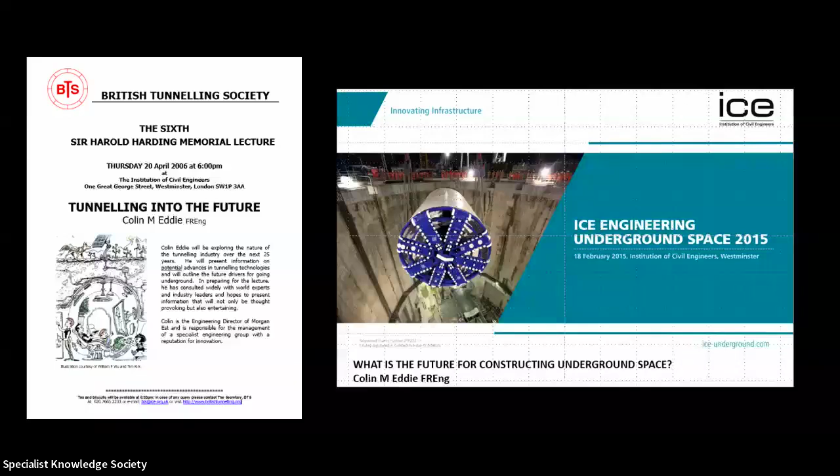John mentioned the Harding Lecture, and as a number of you know, I've been banging on about extruded linings for a long time. The difference tonight is that when I spoke at the Harding Lecture, I just thought it was a good idea and that we should do some further work. When I spoke again in 2015, I didn't have a solution, I was just suggesting this is a really good idea and we should do some work. We formed a number of consortia and applied for government funding to do exactly that, and unfortunately we failed each time. So I got to a point of thinking, if this is ever going to happen, I'm just going to have to fund it myself. As a company we're not big, but we've spent 20% of our annual turnover, about 40% of our profits, on this research. So we've invested in it, and we believe in it.

If we look at the historical context, you're probably thinking, I've heard all this before - haven't they? Extruded linings have been around a long time and they've never worked. I think that was Colonel Beaumont's Channel Tunnel, around 1880. It wasn't an extruded lining, but it's a nice picture.

Arguably the start of this discussion is with Marc Brunel, who spoke about the process of tunnelling around the shipworm and how that shipworm would gnaw at the timbers and extrude a lining behind it. That's the sort of inspiration he took for his patent, which actually looks nothing like the tunnel shield he used on Rotherhithe, but nevertheless was the inspiration.

Some of you may be surprised to know that extruded linings go back a long way. The research we've been able to do over the last 6 years shows the Russians in the 1960s were first. We want to be very respectful of what's gone on in the past - we're standing on the shoulders of other engineers. One issue in the 1960s is that they only had normal concrete, they didn't have any of the wonderful admixtures that master builders can provide nowadays. So this process was a jump shutter - basically erecting a shutter and placing concrete behind it - with no benefit to the industry compared with a segmental lining.

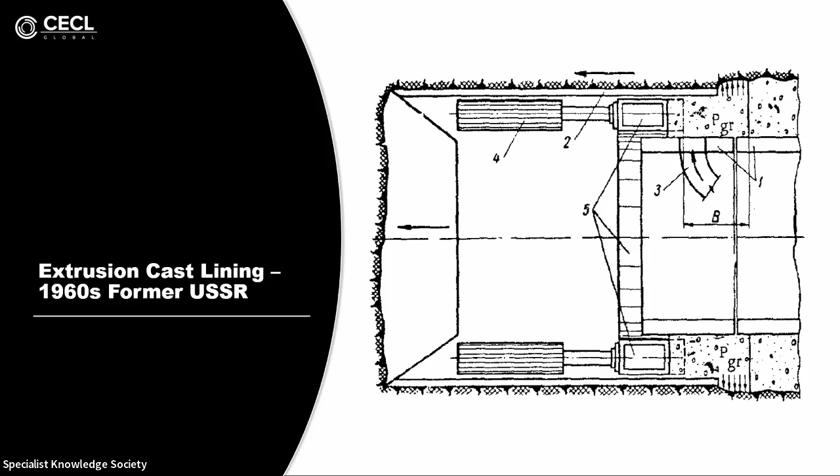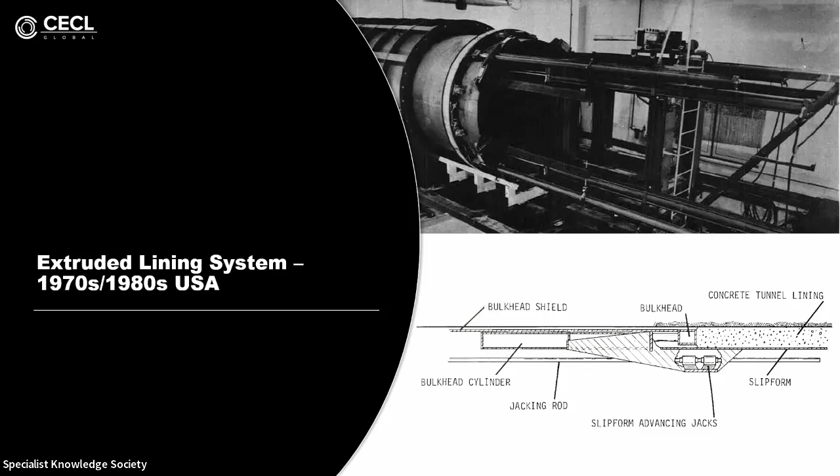So there were many good things that came out of this, but at the end of the day, they threw the towel in. It didn't work, and it was no benefit to the industry.

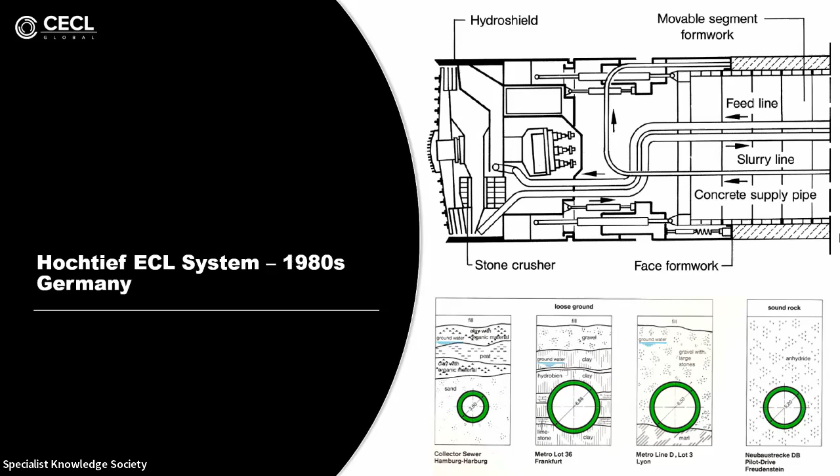We then move on to the 80s, and Hochtief, as a number of you will be aware, spent considerable time and effort looking at extruded linings, and they built a number of projects. But they weren't the most efficient. They certainly didn't break any speed records, and the quality of construction was not acceptable.

And I think this is a really key issue that over my career, as John has mentioned, I've been fortunate to be involved with people that have, and we've been able to do new things, but it's got to be a benefit. It's got to be more cost effective. It's got to reduce the carbon. It's got to be safer. There's got to be a benefit.

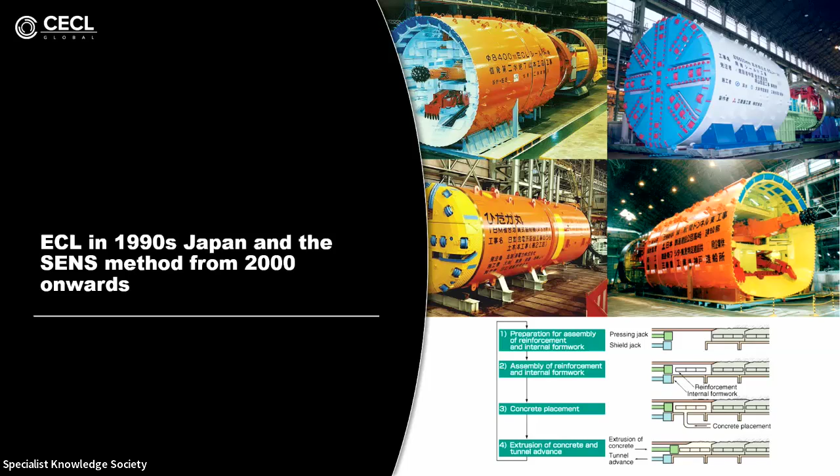And unfortunately, the experience of extruded linings up to this point was perhaps building us to the point we now are. We've got new materials, we've got new ways of doing things, and so perhaps the time has come. I don't think this one got off the drawing board. Again, accelerated concrete, and probably the most recent relining system is using effectively an accelerated sprayed concrete and a form.

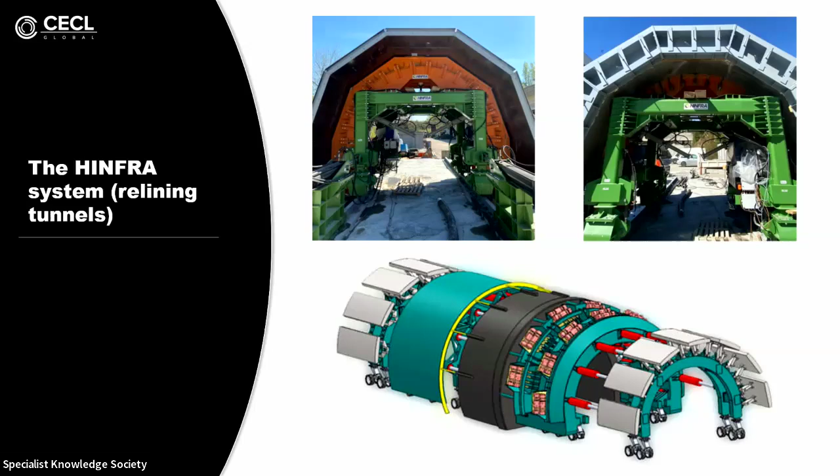So what we're going to talk about this evening is completely different. And I should say right from the start, we're not flying any kites here. We absolutely believe in what we're presenting today, and we genuinely believe that this is a viable method for the future.

We know existing technologies. I quite often followed a vehicle up, I think, the M5. I'm not entirely sure where the segment was cast, but an artic truck carrying one large precast segment, and you're thinking, how inefficient is that?

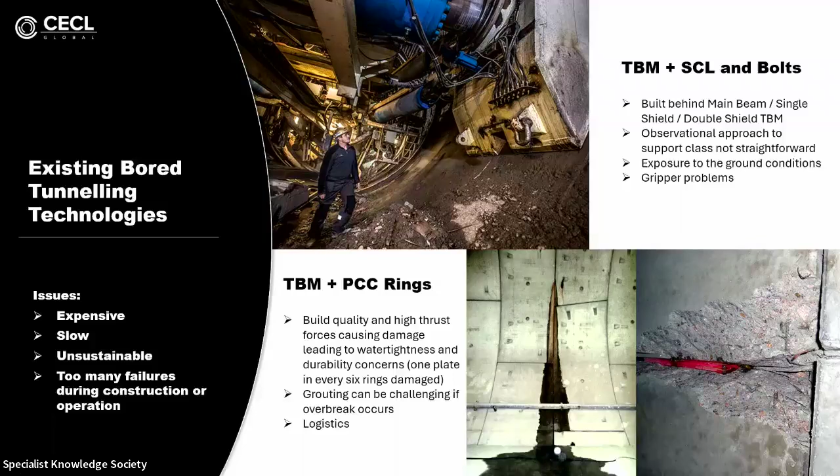And we all know in rock tunnels, we have the issues of using sprayed concrete and bolts and the waste factors and all sorts of issues. With precast concrete rings, which of course, we've deliberately picked a very bad example of some damaged rings, but we all know that it's possible to damage the rings. And what we're trying to do is simplify the process, reduce the waste, and reduce the damage.

But there's three challenges that we have to face. First, the formwork. So the formwork traditionally for extruded linings was not a slipform lining. It was disassembled and reassembled, so labor intensive and of little value compared with conventional technology.

The materials - a lot of the work that's been done on extruded linings was done before the advent of high quality fiber reinforcement and the concrete admixtures that we use today. And the quality - we've not been able to find any examples of defect-free extruded linings.

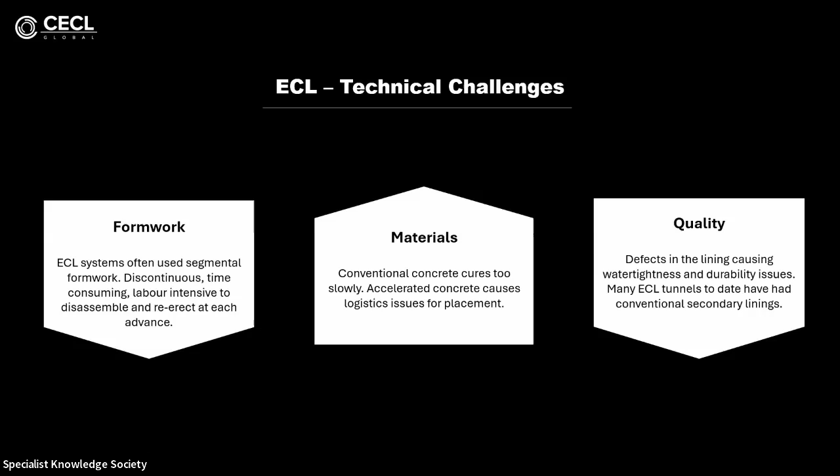So, you know, that's where we're at. So we took a fundamental rethink about how we're going to look at this. And without wishing to steal Henry's thunder, what we're doing is producing an instant structural lining. So it doesn't rely on any chemical process or hydration of cement. And what we've done is look at two different systems.

So the synchronous, which means it lines the tunnel as you're excavating it, and the excavation process could be with a backhoe, it could be with a road header, it could be a full face TBM, it could be a slurry shield, an EPB shield, a variable density shield. The front end, the digging bit, is existing technology. What we're replacing is the lining - we're getting rid of the precast concrete lining and the grouting.

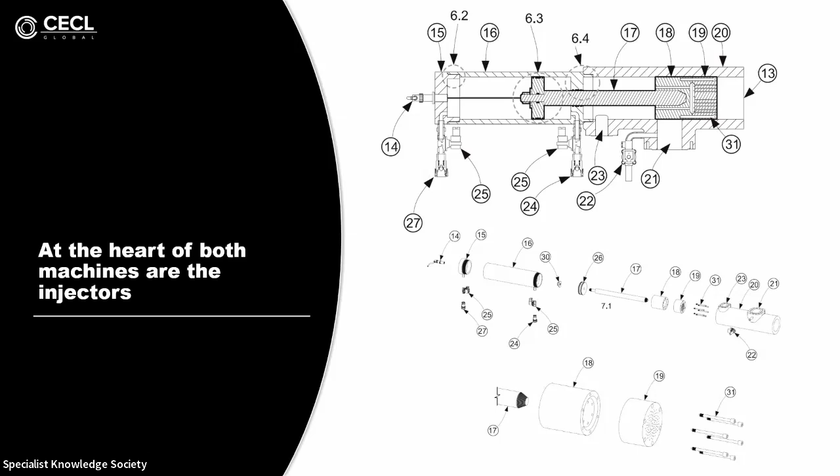But there's also a non-synchronous system, which is meant for relining existing tunnels. And at the heart of this is something we call the injector. So it looks a bit like a concrete pump, but it's not. It hasn't got an interference fit. It's designed actually to squeeze water, a small amount of water, and - Henry will go into more detail - to compress the material to form the structural material.

It can be used for any profile. So one of our partners has got a long history of building TBMs which are non-circular, so triple-headed or double-headed TBMs. So pretty much any of those profiles could be used.

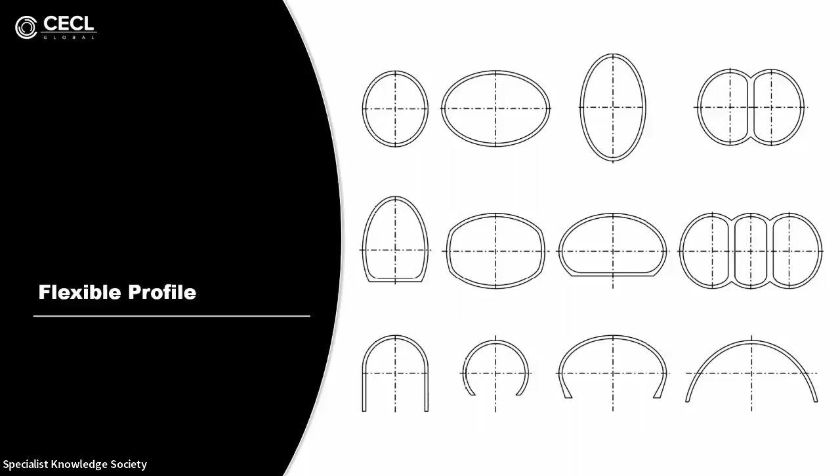If we just look at the basic pillars, there's two parts to the process. My focus has primarily been on the equipment, and Henry, for the last 6 years, has been making lots of mud pies at the University of Warwick and torturing lots of samples, and he'll talk about that in more detail.

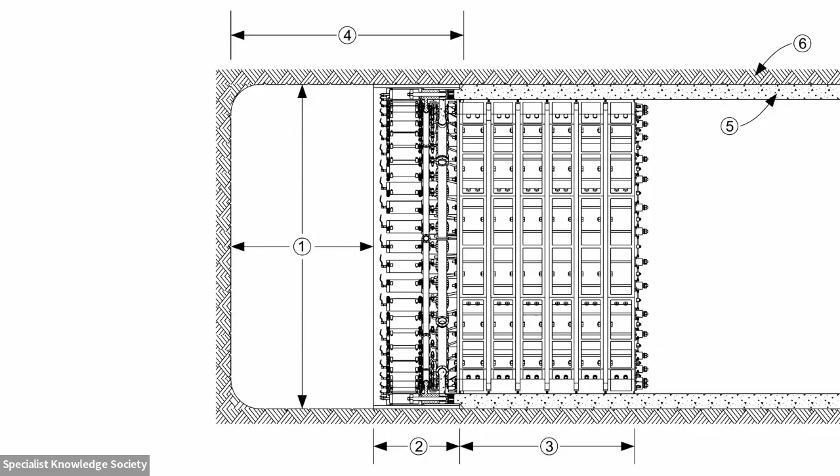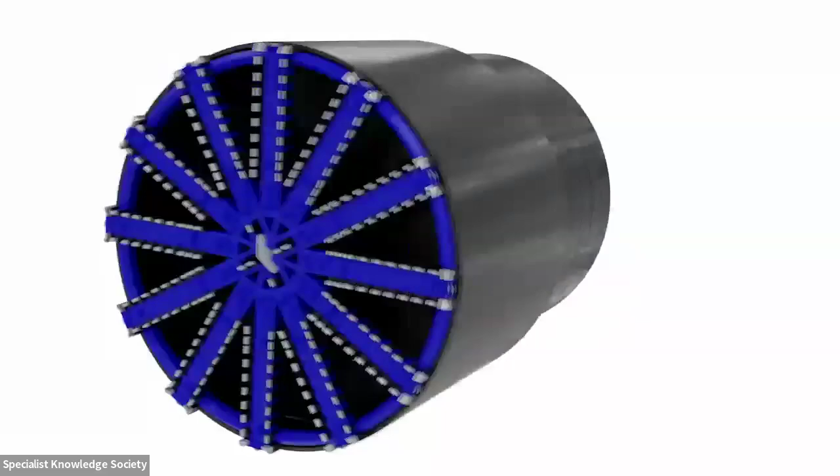So if we just show a visualization, the front part of this machine can use any conventional excavation process. The red pipe is the concrete supply pipe, and the blue pipe is a continuous flushing and cleaning system.

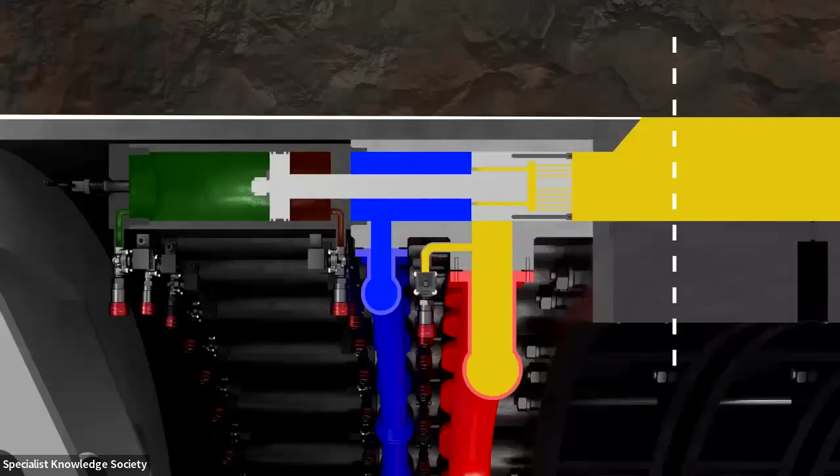One of the challenges, and I expect to get lots of challenges today, is that we all know tailskin grouting systems are the bane of tunneling contractors' lives. They keep blocking, they cause lots of delay. In fact, one very reputable TBM manufacturer told us informally that concrete and TBMs don't go together. We absolutely agree with that.

That's why having an integral cleaning system, which is actually part of the system and systematically done, we think is really important. So what you saw there was the synchronous machine.

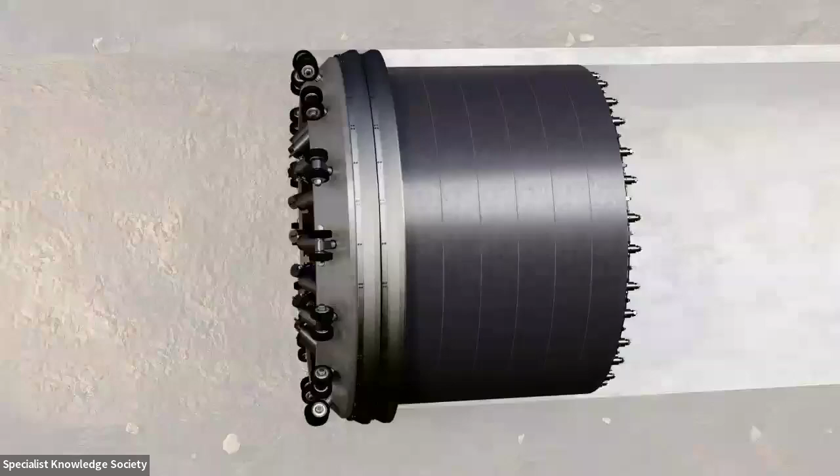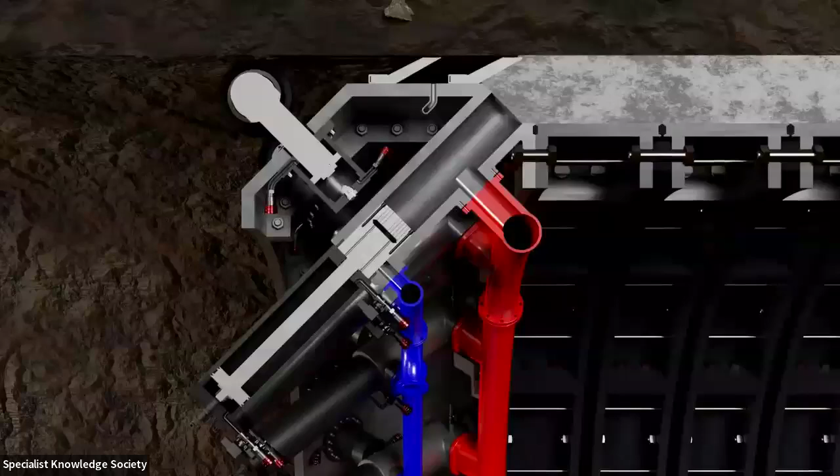This machine, to enable the process to get sufficient pressure to place and crush the material in place, there has to be a resistance. So those wheels, or they can also be skids depending on the nature of the substrate, are controlled by fuzzy logic. We've ruthlessly abused the master's program at Warwick University to look at all of these things, using fuzzy logic to control the load in those wheels, because what we're trying to do is have a self-centering system that'll follow a theoretical set of coordinates, irrespective of where the substrate is.

Within reason, you can see here that the reason the injectors are vectored is that we don't want to generate too much forward propulsion going to the left-hand side of the image. So for the non-synchronous system, that's why we've got the incline injectors.

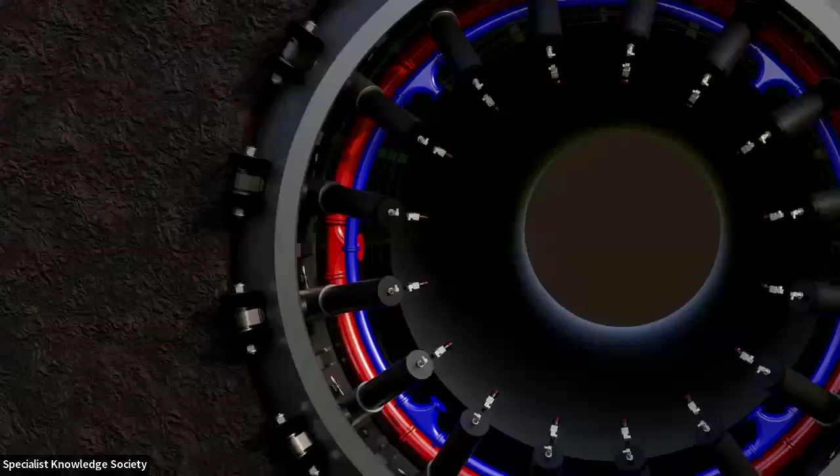One of my team spent quite a lot of time doing these visualizations. The purpose is rather subtle, but you can see that the wheel is sort of going in and out, and they're hydraulic actuators designed to self-center the system, but also to apply the braking.

So yes, there will be drag on the shutter, but actually it's not going to be that huge. So we need to provide another restraint force, and that's where those wheels or skids will come in.

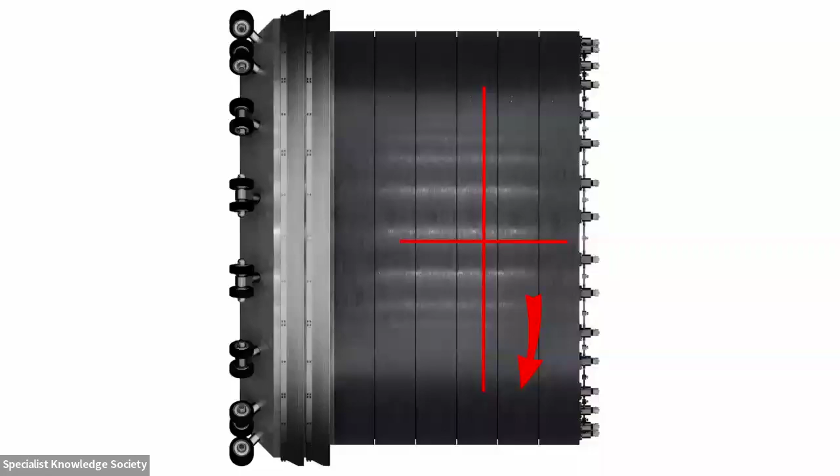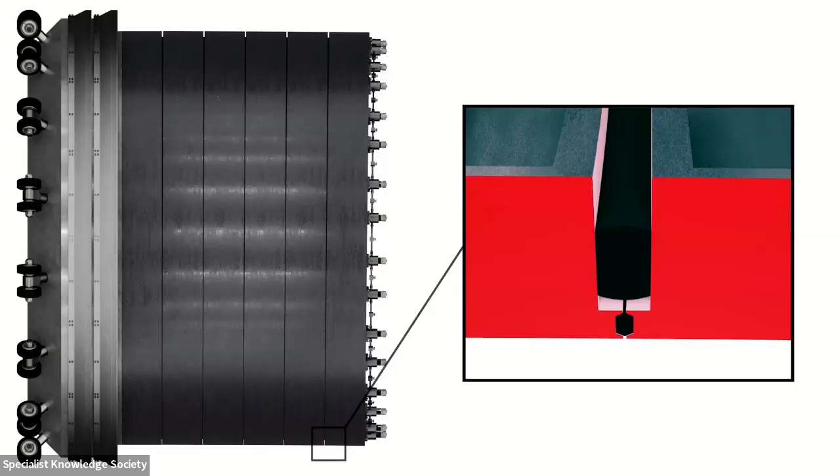The shutter—there's a little printed model that we've got here. This pretty much for any size of tunnel, we're expecting the shutter would be 3 meters long, whether it's 16.5 meter diameter or 3 meters in diameter. The shutter's articulated, obviously, because it needs to go around corners, but it's passive articulation.

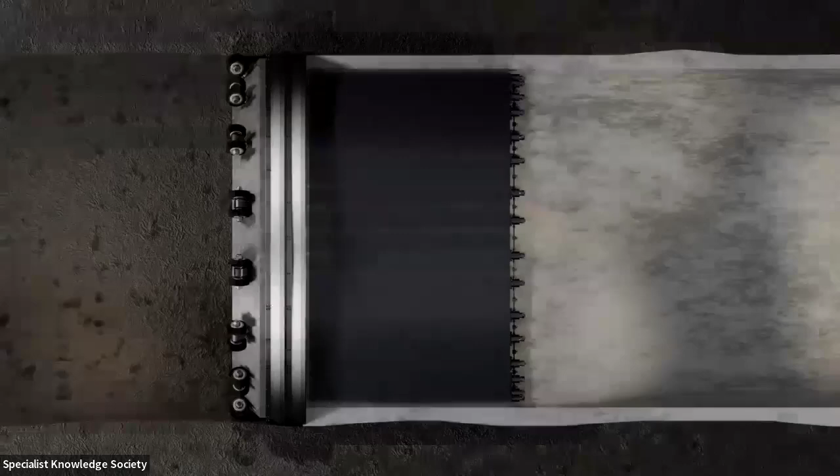At the end you'll see there's some hydraulic rams. The high tensile Macalloy bars, or Dywidag bars, run through the length of the shutter. Those actuators are coupled in series, so all of the load in each of the bars remains exactly the same, irrespective of how long the bar is. We think that's really important because we've got to go around curves, and we need a passive, dumb system.

So at the heart of this machine is its simplicity. It's absolutely simple, and it's been built such that every component could be replaced underground if necessary.

If we just look at the balance of forces, the only thing that's moving this machine forward is the injectors, and there are quite a lot of them. For a typical shield, we kind of default to 49 actuators. There are a lot around the perimeter because we don't want them too far apart.

Those injectors have got to provide enough forward propulsion to overcome the thrust on the cutter head, the drag on the shield, the drag on the shutter, and the fairly nominal loads that would come from any trailing gear.

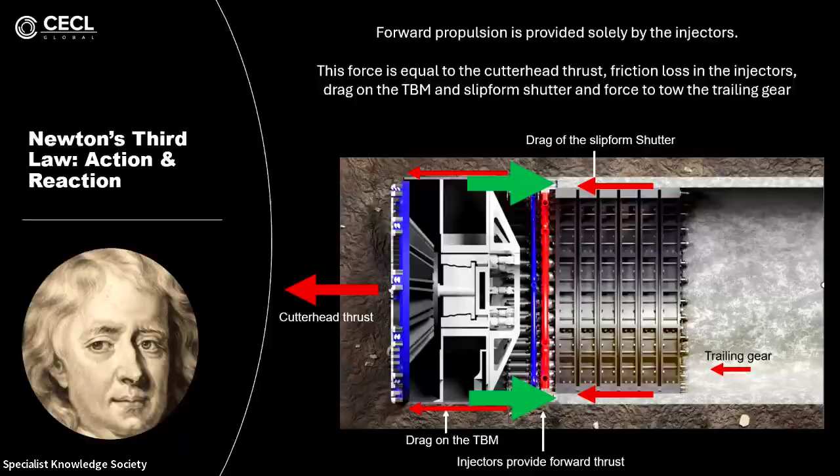If we just look in real time, the typical stroke for the injector would be about 300 millimeters. So it's actually very little concrete, very little and often. The speed you're seeing in this animation is probably the sort of speed if we were advancing a TBM at, say, 50 millimeters a minute. Most of us would be pretty happy at 50 millimeters a minute.

The whole system, however, has been designed for significantly higher advance rates. But of course, for the synchronous system, that depends on how quick we can excavate the tunnel.

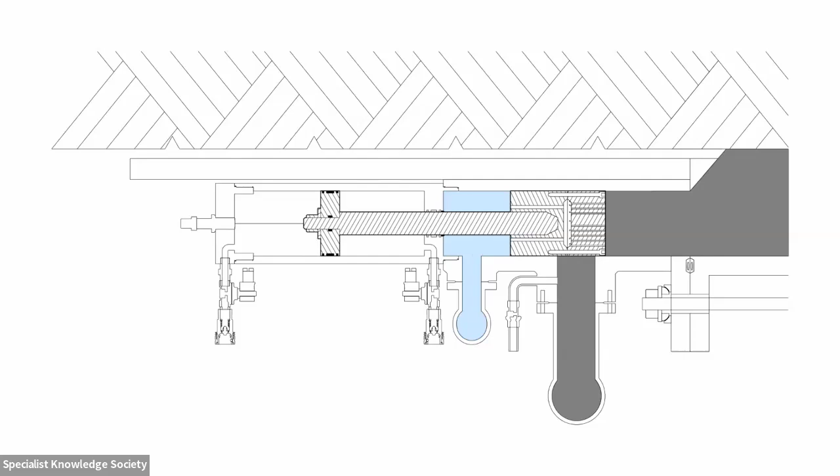A really important part here of the design is the length of the injector head. That bit of metal at the front covers the supply pipe because obviously we don't want to just press the concrete back down from the position that it came from.

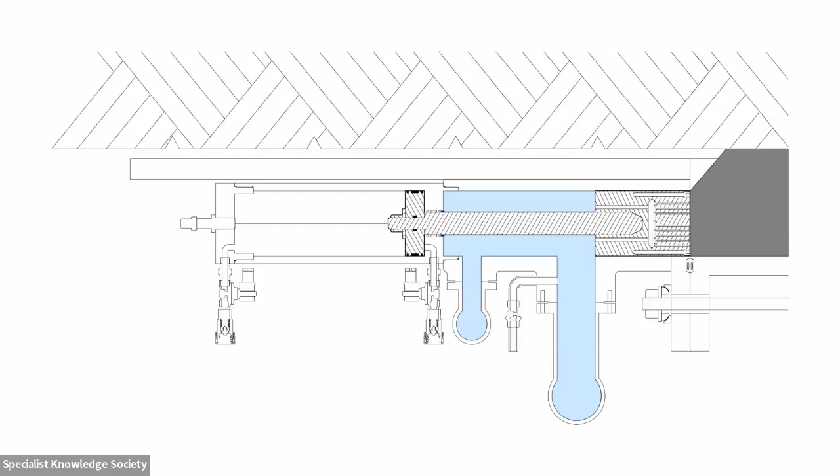And then at the end of the cycle, being overdriven such that the whole system will go into flushing mode for cleaning purposes. If we cannot clean this system, it will be hopeless. It will never work. We're not using concrete, but it's quite similar, and it does have some Portland cement in it. So we've got to keep the system clean.

And if we unwrap the system, this animation is a little bit crude in that it kind of shows all of the actuators moving in and out at the same time. This is not correct, actually.

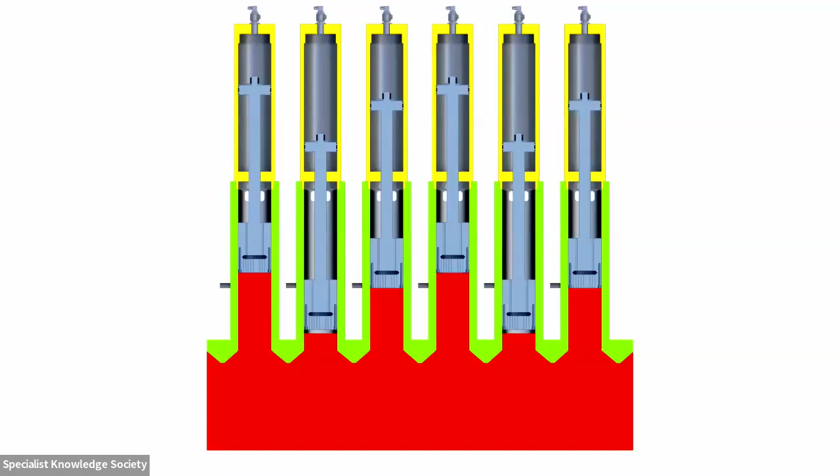In reality, each injector has simple laws that it's given. The simple law is it continues to push until it gets to a maximum pressure, and then it stops. Its next law is if it gets to its full extension, it returns. And its final law is if it's been told it's going into cleaning mode, it pushes an extra 100 millimeters further. And so the rate of advance of the machine is governed just by one parameter, and that's the speed of the forward stroke of these injectors.

And so with that, I'll hand over to Henry.

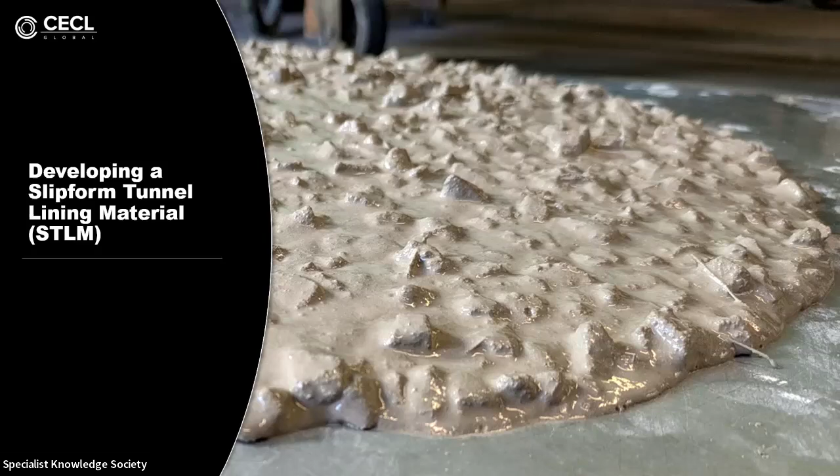Thank you, Colin. So the starting point for our research and development into a slipform tunnel lining material, STLM - that's the acronym I'll probably keep referring to - is the requirement. So what does this material fundamentally need to be able to do at each stage in the process?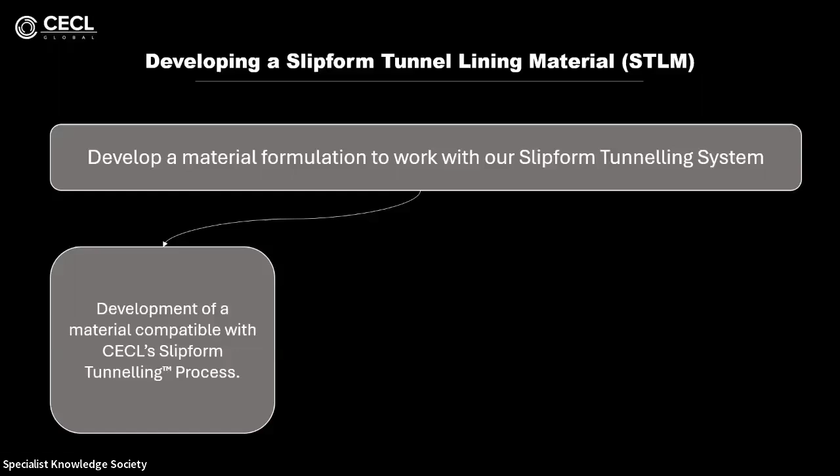Firstly, it needs to be compatible with the slipform tunneling process, and this has involved some iteration with the equipment design and development, as well as the material research and development work. And the material also needs to be commercially viable, meaning consideration of component costs, embodied carbon, and material availability have been very important to the development.

We know from the outset of this process that it'd be unsustainable for the process to rely on expensive or exotic components which have, say, poor global availability. A key part of the development has been consideration of the mechanical properties. But we've also been mindful and done a holistic systems engineering approach to this development, to ensure that the material satisfies requirements on things like fresh properties and long-term durability, as well as the logistics implications of actually constructing this underground. So it's been a 5-year research program to develop the STLM to where we have it today.

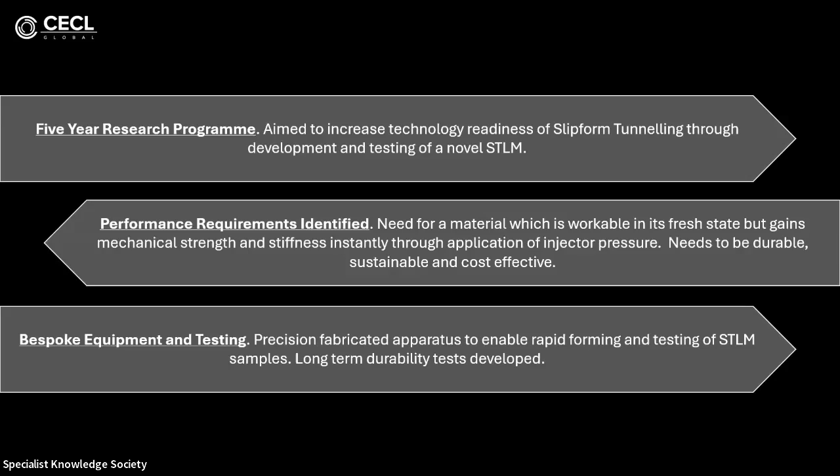And in order to effectively test the material, we've developed bespoke equipment to simulate the injection process and understand the properties of the material post-injection, with physical research carried out at the University of Warwick.

So we developed a bespoke arrangement to simulate the conditions of injection at full scale in the laboratory. Using a 100-ton servo-hydraulic actuator on a modular reaction frame, we're able to form large samples - 150 millimeter diameter, 300 millimeter high samples - under pressure as part of our development and testing work.

So we've designed our forming equipment, this sort of simulated injector, as a split cylinder. This split cylinder is heavily reinforced to keep its stiffness, with bolted sections together, which can be rapidly demolded following forming. It has a common base plate to this system, and then we can test it quite quickly after forming in either an unconfined or a confined triaxial testing arrangement.

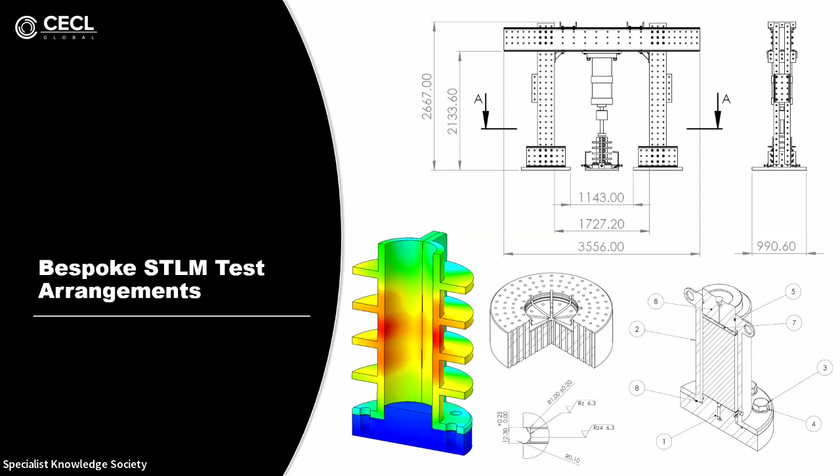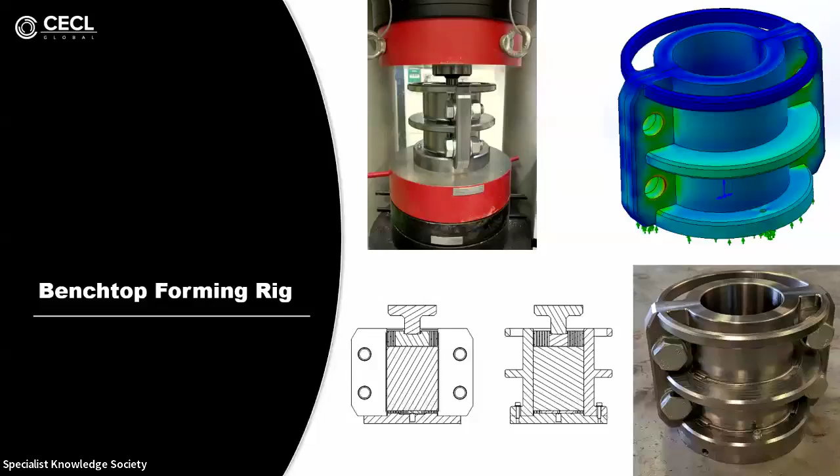So more recently, we've developed a smaller, slimmed down version of this rig, which allows forming of smaller samples for material characterization - a benchtop forming rig. It's a rig that can fit in a standard compression test machine for concrete and can be handled by a single person. So it allows more samples to be made in one working day, and has been very useful for some of the more recent mix optimization trials we've done. And looking forward, it could be used as a production quality assurance tool as well.

So onto the STLM mix itself. What we've developed is something that is flowable in its fresh state, but upon application of this injection pressure, it immediately gains strength and stiffness through mechanical processes rather than a chemical hardening process, densifying the material in situ through that high injection pressure.

The mix itself has many of the components you'd see in a conventional concrete, so aggregates, cementitious binder, water, steel fibers, polypropylene microfibers, but it's formulated in such a way that it's enhanced by this mechanical process to give us this very early age strength and stiffness.

So the binder component of it uses Portland cement, which is replaced with partial replacement with limestone and calcined clay, supplementary cementitious materials, and overall has quite a low Portland cement content.

We've deliberately moved away from using GGBS and fly ash as SCMs for availability, cost, and sustainability reasons, and preferring the LC3 type binder that we've been using.

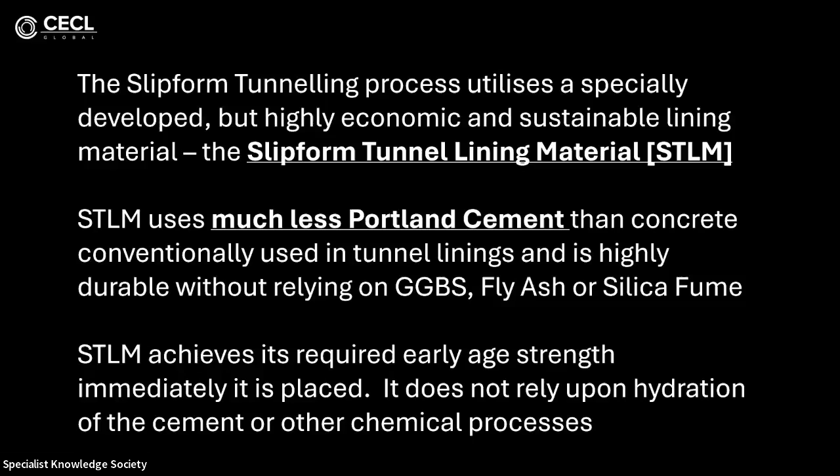So when I talk about very early age strength and stiffness and mechanically derived strength and stiffness, what do I mean by that? We've done some isothermal calorimetry studies on the binder part of this mix, and what that shows is circa 10 hours, we start to get the main hydration reaction happening in the initial setting of this material.

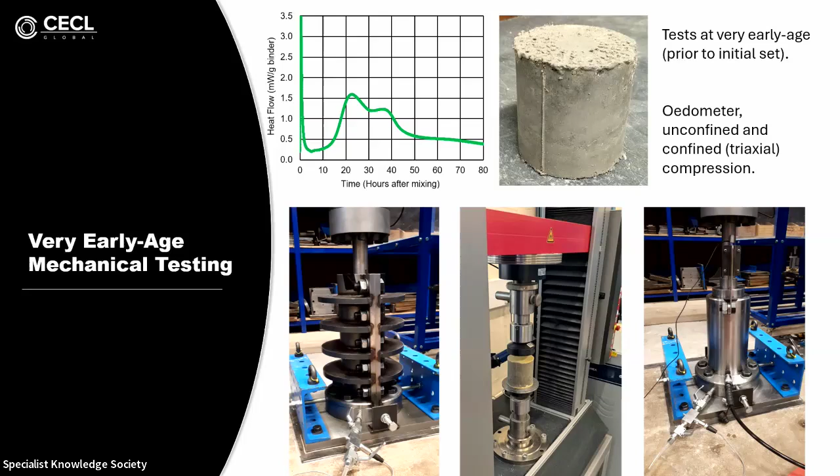So we've been doing our very early age tests at less than 2 hours typically from mixing. This is well before the initial set and the main chemical process kicks in. That 2 hours is basically as fast as we can strip and demold the sample from the equipment and set up the strength test. So the results at this very early age are really mechanically derived strength and stiffness, purely from that compactive effort.

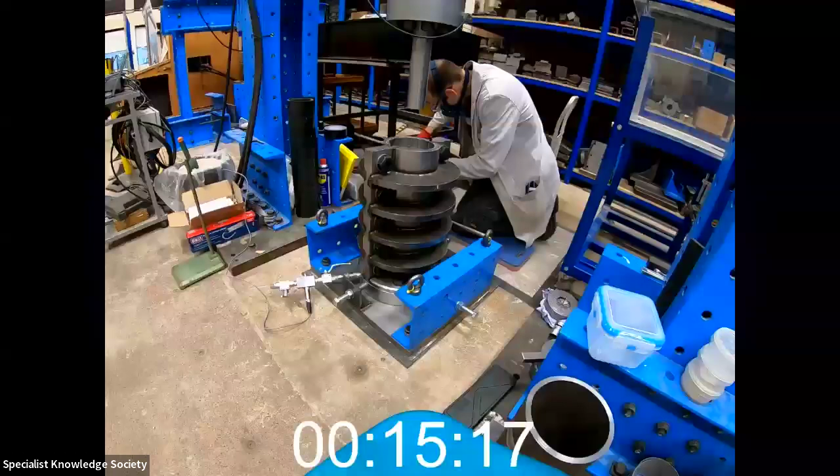So this isn't me just having had too many cups of coffee - this is a sped up video of the whole test process, from mixing the materials right through to forming the sample.

So we've put a lot of instrumentation on this rig, controlling the deflection rate to simulate the injection process with the servohydraulic actuator, measuring the stresses in the sample, recording these with the data logging system, and looking at things like pore pressure within the sample.

This is essentially almost like an oedometer test. What we're doing during the forming process - and I've definitely got a stronger right arm from doing all these bolts up hundreds of times in the lab now.

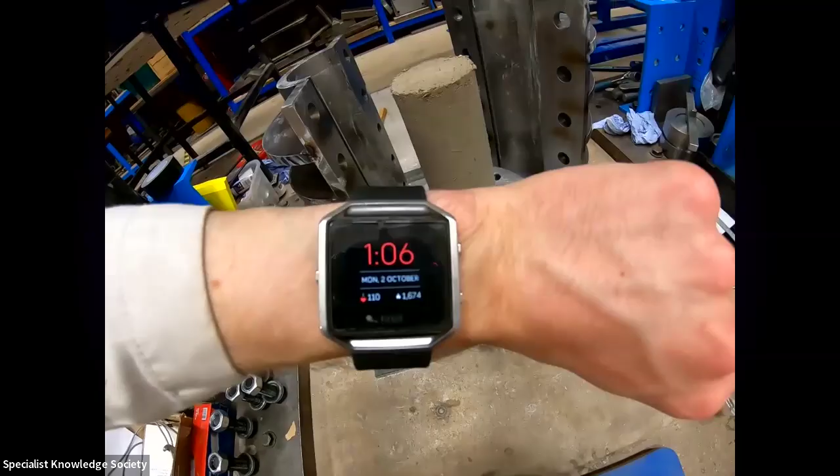But you'll see when I strip the sample, this is what we're forming very rapidly. So it goes from a flowable concrete through to something with appreciable strength and stiffness instantly because of that high compactive force from the injection pressure.

So on to looking at the mechanical performance that we've observed in the testing. The material exhibits a stress-dependent shear strength behavior from the triaxial testing that we've done in the very early age - this is also sub 2 hours after water hits the cement - as well as stress-dependent stiffness and ductile behavior in this material.

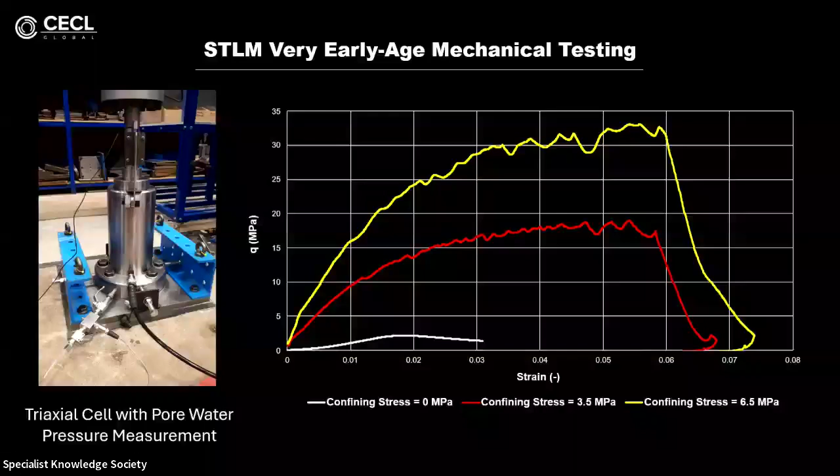So this can be fitted to the well-known Mohr-Coulomb relationship and strength envelope, where we've been able to demonstrate a significant cohesion to this material, as well as a high internal angle of friction for the material at very early age.

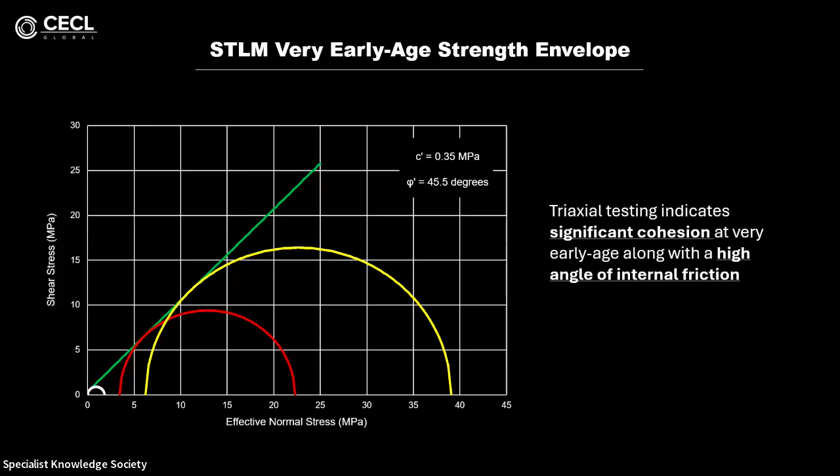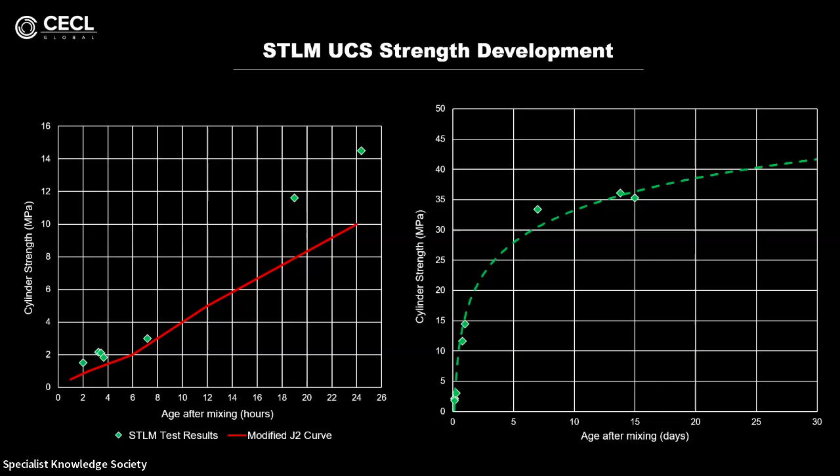If we look to longer term, so when we're expecting some hydration from the binder components, we achieve a good strength gain in the first 24 hours, exceeding that required by the modified J2 strength curve, and structural concrete behavior in the longer term, where the chemical hardening of this ternary LC3 binder system has been working very well, even at high replacement levels.

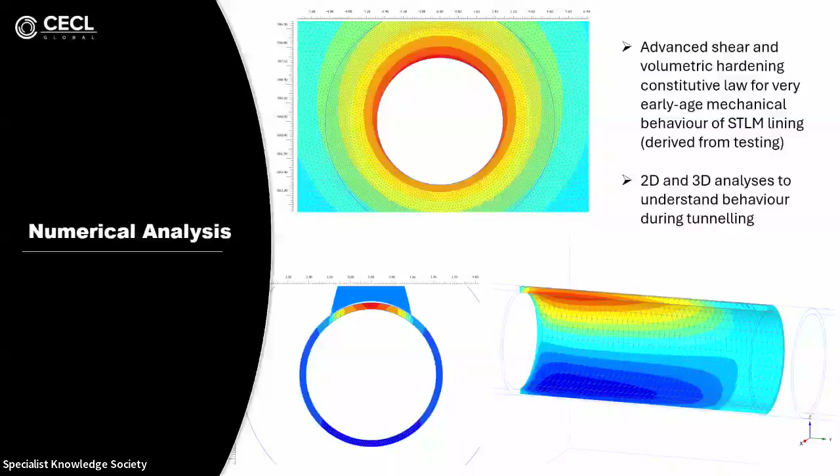We've also done validation in numerical studies and finite element studies, 2D and 3D, using the results of the physical testing in forming an advanced constitutive model for the STLM, running simulations at tunnel scale, and looking at strain-based considerations to understand its performance in the real world.

Onto the robustness and durability aspects and the testing and analysis we've done here.

Firstly, a qualitative look at the STLM structure from peering inside these samples using X-ray CT scanners, with some assistance from the National X-ray CT Centre, which has a base at the University of Warwick.

It's apparent that the STLM samples are tightly packed, with a high aggregate ratio in their compressed form and low porosity, and a high density of 2,500 kilograms per meter cubed or higher. This qualitatively suggests that the lining would be very durable in the long term.

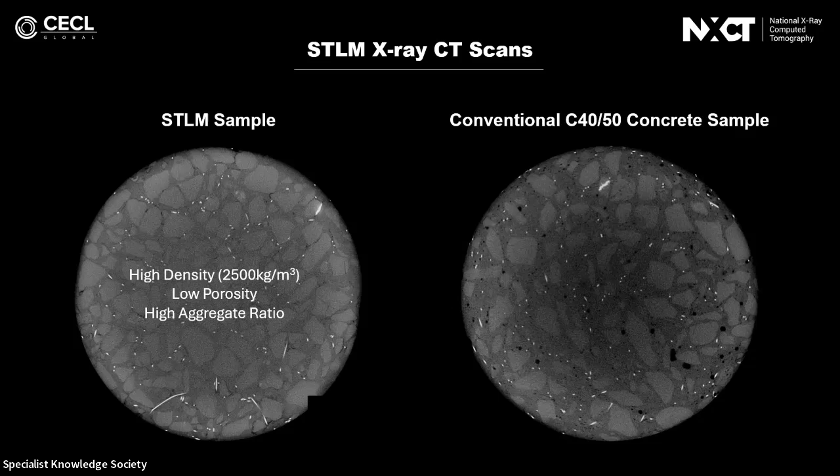But then looking to more quantitative aspects of durability and durability testing, we've done shrinkage testing.

Shrinkage is obviously a very important consideration for a monolithic tunnel lining. Samples of STLM have been monitored for shrinkage for nearly 3 years now, and compared to some conventional cast concrete samples, we've seen good results in terms of low shrinkage. With these long-term shrinkage strains, in a restrained tunnel situation we'd expect the lining to be uncracked in the long term from shrinkage strains, which is a big positive in terms of water tightness and durability of a slipform tunnel lining.

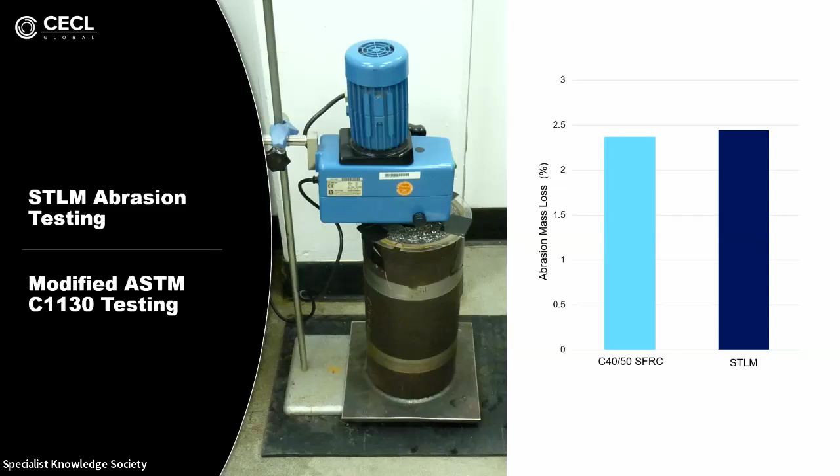Abrasion is another durability concern, particularly for hydraulic tunnels, and we've undertaken a modified version of the ASTM C1130 underwater test. A sample is submerged in a steel tube, we put varying sizes of steel balls on top, and underwater, a motor and paddle spins the arrangement at 1200 RPM to generate an abrasive action. We leave that running for 7 days, like a mini washing machine, and measure the mass loss from the samples because of that abrasion. We found comparable performance to fiber reinforced structural concretes.

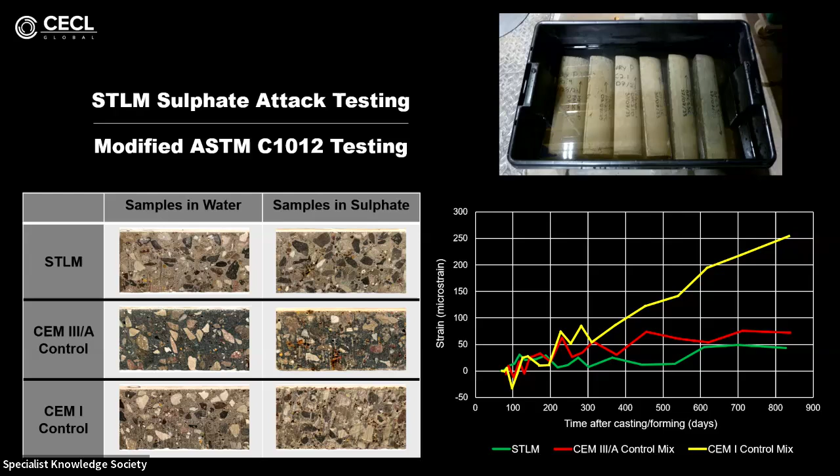Sulfate testing - sulfate attack being a durability concern in certain geological environments. We've done modified ASTM C1012 testing, submerging samples in a strong sodium sulfate solution and measuring their length change over time. We've been doing this for over 800 days now and have seen very low expansion from the STLM samples, which compares very favorably to control concrete samples, visually as well. You can see the control samples showing visible signs of distress, whereas the STLM samples remain almost as good as when they went in.

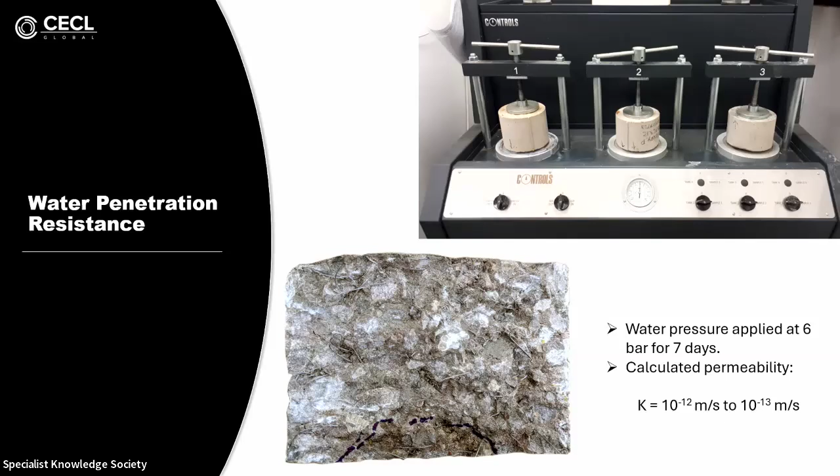Looking at water penetration testing, we've done this on samples to give an estimate of permeability. Owing to the high density, low porosity of the material, the calculated permeability from the water penetration test has been very low.

I've had a few questions on what happens after stoppage and whether there'll be a cold joint in the path for this process. We all know stoppages are part and parcel of tunneling, so to answer this we formed some samples in two halves - forming half a height sample, leaving it for 7 days, then coming back and forming a second half on top to create a joint. The high pressure in the process means these joints are very tight and essentially invisible.

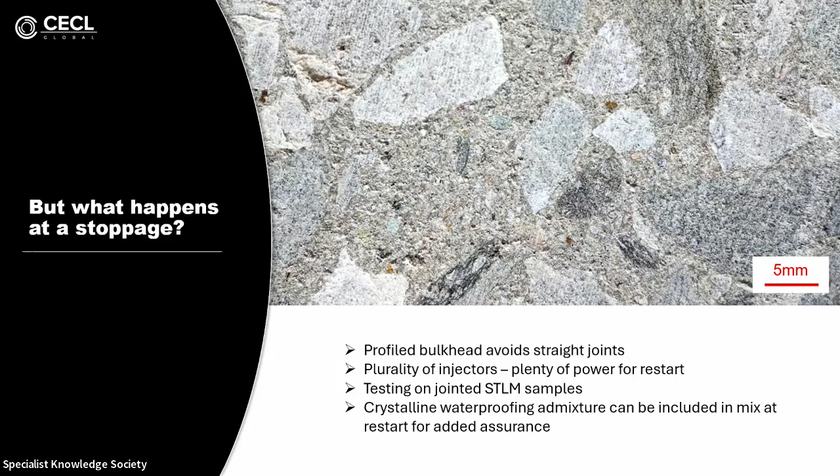Early water penetration tests have also indicated that these joints aren't forming any sort of preferential water path. Coupled with other features of the process - the castellated profile of the injector bulkhead, the large number of injectors giving plenty of power to restart, and the longitudinal thrust provided on the lining at restart - we don't think there'll be an issue with stoppages and restarting a machine in a slipform tunneling process.

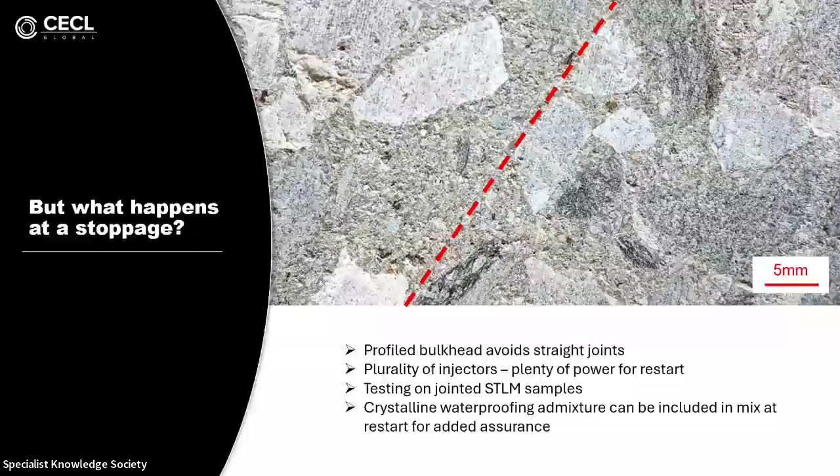A final word on standards compliance. The way we've designed and developed this material has been novel, but we've also been mindful of standards compliance for assurance purposes. The binder itself, the LC3 ternary binder, complies with EN197 Part 5 in the UK and Europe. The recent BSI Flex 350 standard in the UK also gives us a performance-based route to compliance for novel mixes. All of the mix component parts are standards compliant as well, commonly used in concrete mixes today, which further provides assurance to the quality of the mix as used in a slipform tunneling process.

So with that, I'll hand back to Colin to talk through some benefits.

He's a class act, isn't he?

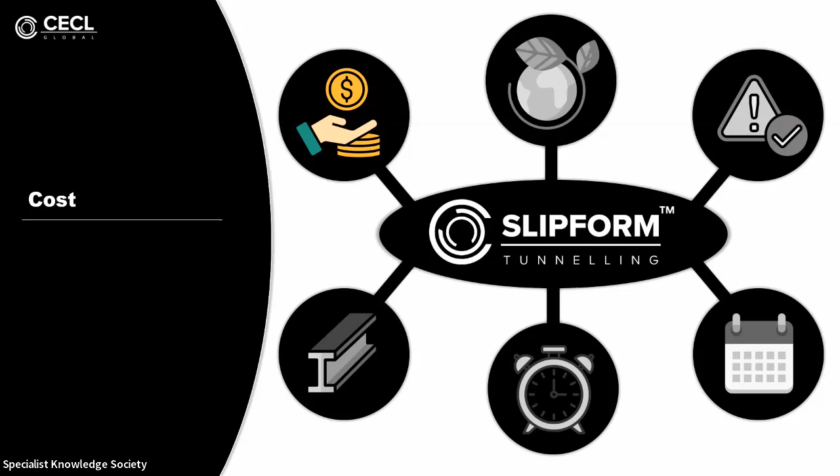So what's in it for contractors, consultants, clients? We're going to start by talking about cost. Before I start talking about cost and carbon, I should mention we've been very privileged as an organisation to have been commissioned by National Highways to build cost and carbon calculators. Those calculators have been used to set the affordability limit and budgets for projects like Lower Thames and Stonehenge. The purpose of saying that is we're not a bunch of academics saying this is going to save you X as a fantasy - we're using exactly the same metrics and parameters that we would use to set these budgets.

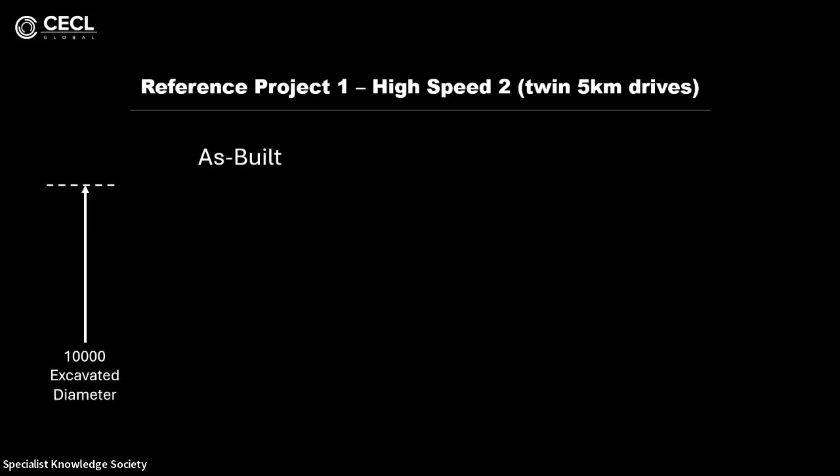So if we just look at a couple of reference projects, we've got a rail project and a water project. If we take High Speed 2, typical proportions: 400 millimeter precast segment, 200 millimeter because the overcut on TBM seems to get bigger each year, and an internal profile of 8.8 meters diameter.

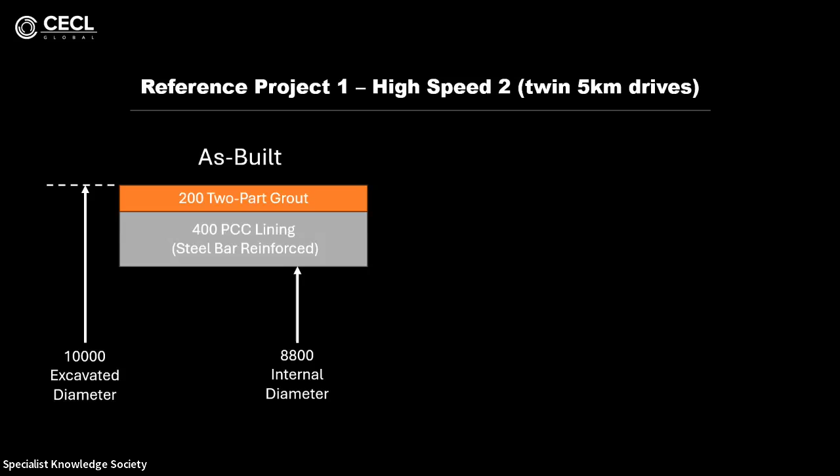If we look at the slipform alternative, we have a much smaller excavated diameter because, as we know, a lot of the ring thickness in a precast ring is to accommodate things like gaskets and fixings. Thankfully we're moving away from bolts now, but the thickness is seldom governed just by the MN diagram of the lining.

We're confident this is a one-pass lining, a watertight, structurally integral lining. And of course, the internal diameter has to be the same.

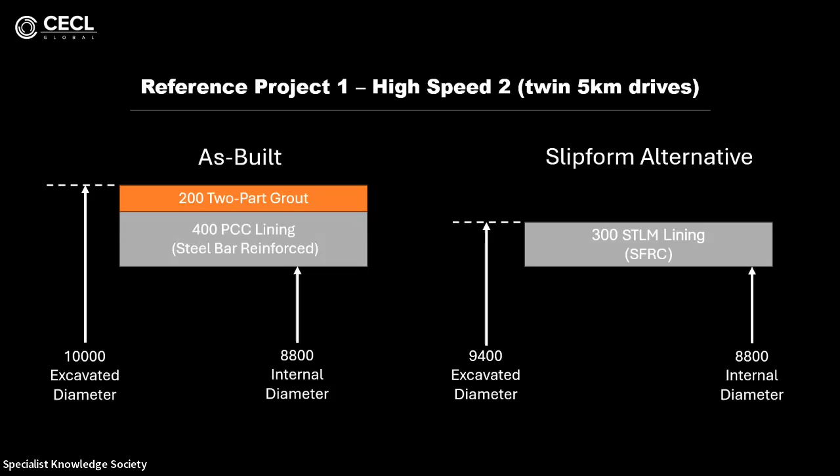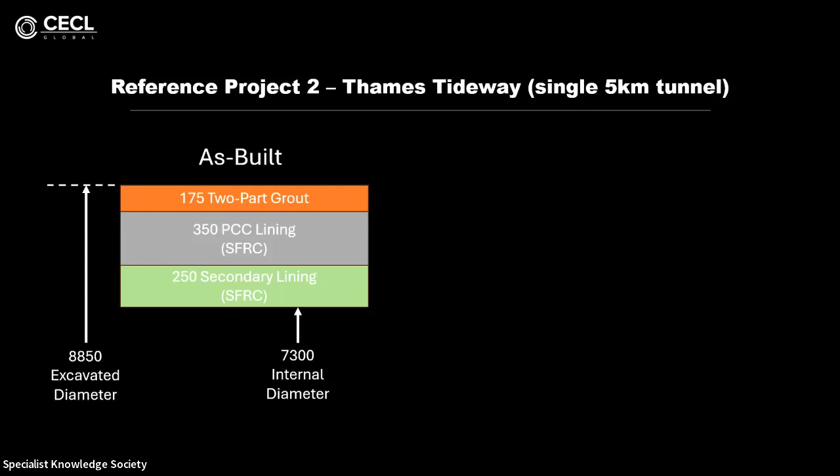The second reference project - and I'm sure most of us in this room would have hoped that Thames Tideway hadn't put the secondary lining in, but they did, so we'll benchmark against that. In comparison, the slipform alternative again has a much smaller excavated diameter because we're getting rid of a lot of the processes, with a single pass watertight high integrity lining.

And what does that do to the cost? Well, we've looked at both the material cost savings and the total cost of construction. The total cost benefits from the increased speed of construction, the reduced number of personnel, and the reduced material quantities themselves. The saving we have calculated is 50%.

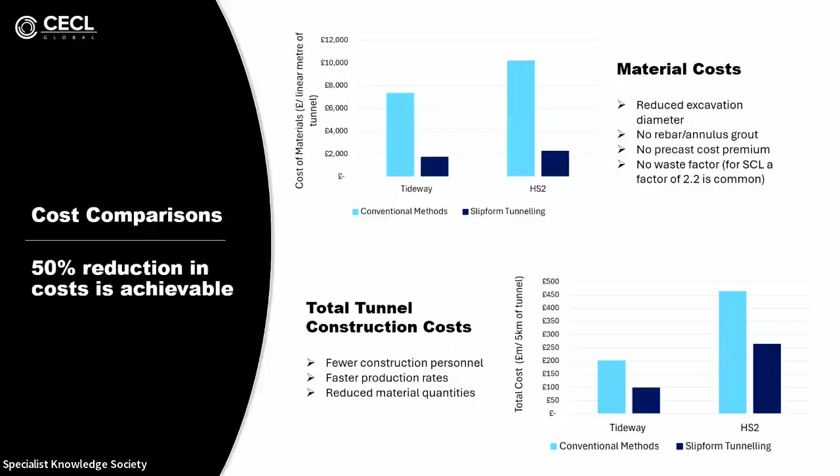So you might think, well, how can just the lining process save 50%? Well, it's because we're saving on personnel, we're going faster, and we're reducing materials - we're eliminating building rings, we're eliminating the grouting process. If we look at sustainability, it's the same with carbon.

The STLM has a certain amount of Portland cement. We couldn't get it down to zero, but we're using very sustainable materials, and as Henry explained, the use of LC3 calcined clay. It's not big in the industry at the moment, but there's the old English China clay quarry in Cornwall that's got the capacity to produce as much as the industry can use. And we all know that slag and PFA - the world is fighting over the dwindling resources.

And of course, we're not making steel and burning coal in the UK anymore, so it's going to come from overseas. So when we turn the handle using absolutely agreed parameters for all of these materials, we see a 50% reduction in carbon.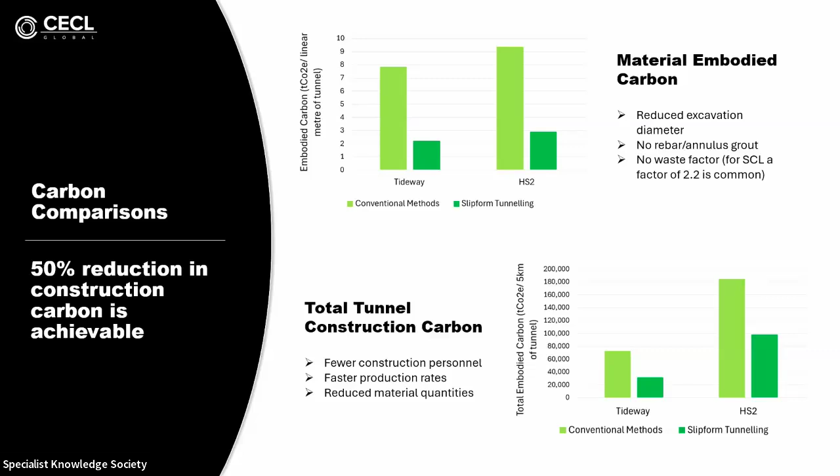Potentially - and we see this more not really as a sustainability issue or a cost issue, but it's a really good news story for a client. If a client can say, you know what, we're digging this tunnel and reusing the spoil to build the lining - in reality it doesn't save a huge amount of money, it might save 10% of the excavated material instead of sending it off-site.

So for projects like Glendo, which we've got a keen interest in, we would like to look at whether the metamorphic rocks from that site could be processed.

There's one thing Henry hasn't mentioned - there's some alchemy that happens when you crush these aggregates. The mix you saw in that picture looked really stony and bony and horrible, but that's before it's crushed. When it's crushed, it tends towards a fuller maximum density curve. There's this amazing thing that happens in nature - when you crush it, it's actually forming the perfect gradation, and that's why it's so dense.

So it might be only 1 in 10 projects where you'd be able to use the materials, and of course we know there's all sorts of processing licenses involved, but potentially we see it as a good news story.

If we look at the steel fibers, for years we've worked with Bekaert, as in my former life - and I should say that Henry and my other colleagues all used to work for me in my former life. Bekaert have made some real strides forward in looking at recycled fibers. You're probably all aware that for years people have been trying to chop up car tires to recover the high carbon fiber from that.

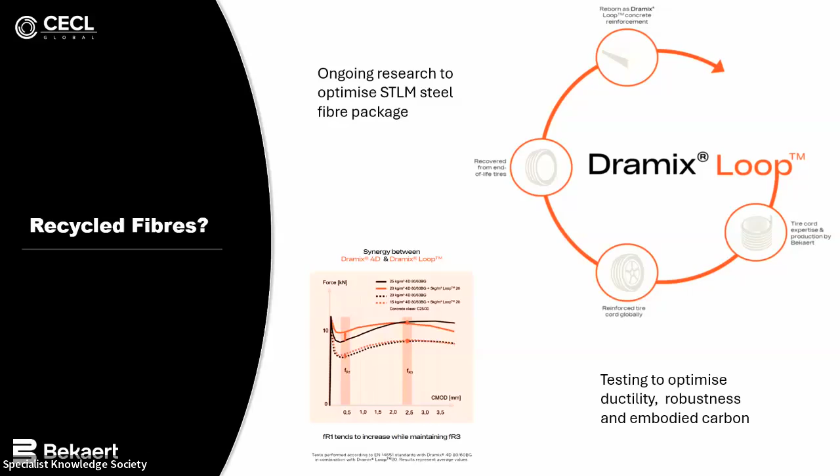If we look at safety, we know that the safest thing you can do in tunneling is to eliminate a process. So if we look at what we're not doing, we don't have any rings, we don't have a segment factory, we don't have the repetitive strain injuries that we're often seeing in those sorts of facilities. We haven't got to fit any gaskets, we haven't got any bolts to install, we haven't got any grout, no grout blockages, we don't have any secondary lining or waterproofing measures or shotcrete or rock bolts.

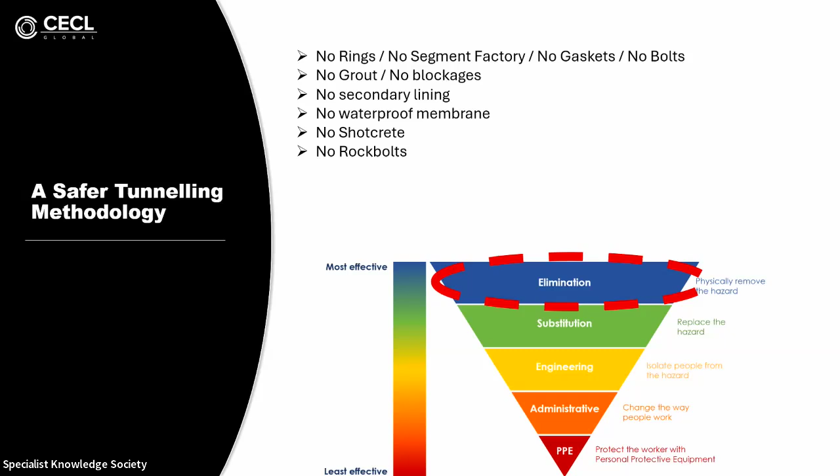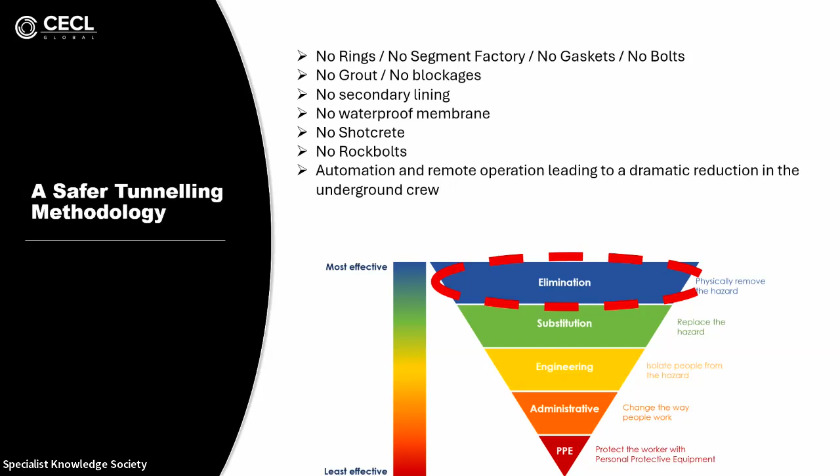And we expect that this process will lend itself much more to automation. Of course, there are going to have to be people in the tunnel to extend the services, and of course the huge issue now is the logistics, which I'm going to turn to. So we would see whether the driver is on the surface or in the tunnel, it doesn't really matter. But there is definitely an opportunity to greatly reduce the number of personnel within the tunnel.

So we're reducing a number of processes. We're not building rings and we're not grouting, but we need real-time verification of the quality. We're suggesting that this process could be suitable for any size of tunnel in pretty much any ground condition, whether it be water-bearing sands or gravel or hard rock.

If there's a holiday, if there's a window in this lining, then that's a catastrophe. So we've been working very hard at looking at how we can guarantee the quality of that lining before it appears out the back of the very short shutter. And bearing in mind at its maximum advance rate, that's 30 minutes after the point it was placed.

So we've got some very bright colleagues at the University of Warwick who've got a number of ideas about how we can systematically measure the integrity and make sure that there are no gaps.

And one thing I haven't majored on - if you imagine you're excavating through, say, a karst limestone with holes in it, or you get overbreak, this system is very similar to a pressure grouting system. The machine cannot move forward until it's filled any void on the outside, and each injector has its own controls, and it just does its own thing, and it keeps pushing concrete in until it gets the back pressure.

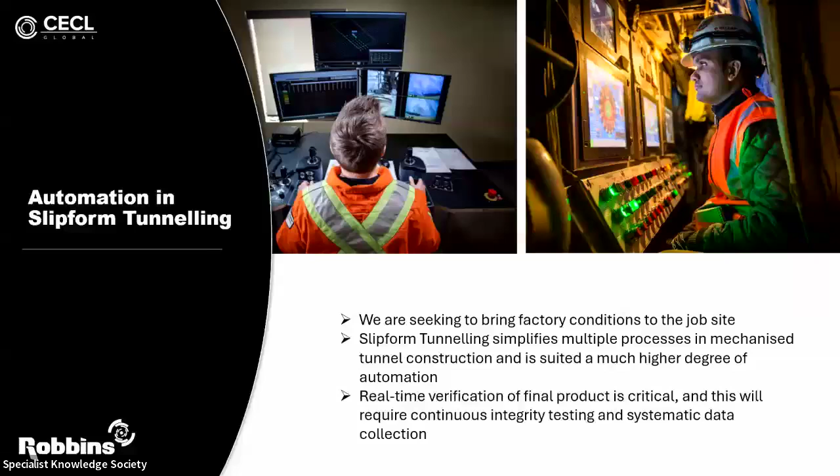And we all know that interlocked machines, grout interlock, is normally the first thing that the miners turn off because it keeps stopping the machine and it stutters. But we and our partners believe that we can resolve that.

So if we look at the speed of construction, I don't know why we say 100 mil a minute, because you could go as fast as you like, as fast as you could supply the concrete. But 100 mil a minute realistically is the fastest excavation rate. If you were relining an existing tunnel, I think you could go even quicker than this.

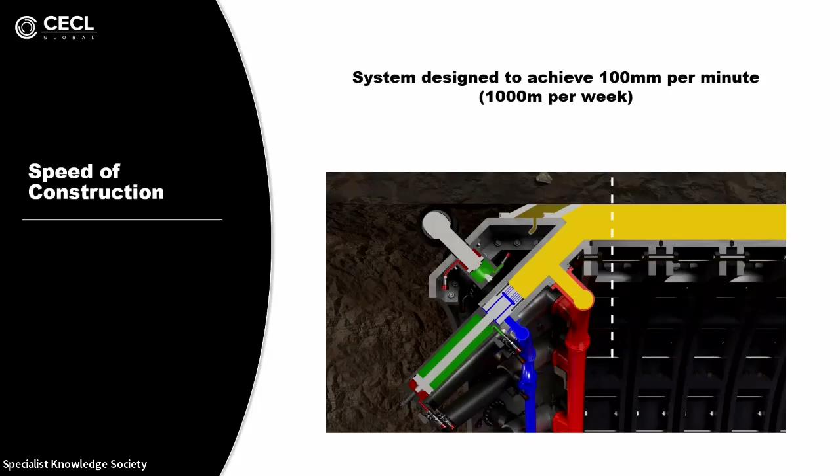One thing I should say is that these animations all appear as if it strokes, it moves forward and stops. It would actually be a continuous process because all the injectors are working together. But for the purpose of the animation, that's why it keeps stopping.

We have undertaken extrusion and injection tests, and the primary purpose of this was to try to understand that if you're pressing effectively a wet concrete into a confined space, what lateral pressure will it exert on the shutter? What is the friction? This enabled us to quantify both of those things.

We've also done extensive work on looking at the durability of the steel components which are in contact - the shutter itself, and the injectors. It is amazing if you look at concrete pumps, which work at comparable pressures, a little bit lower, but they have incredible durability using special steels.

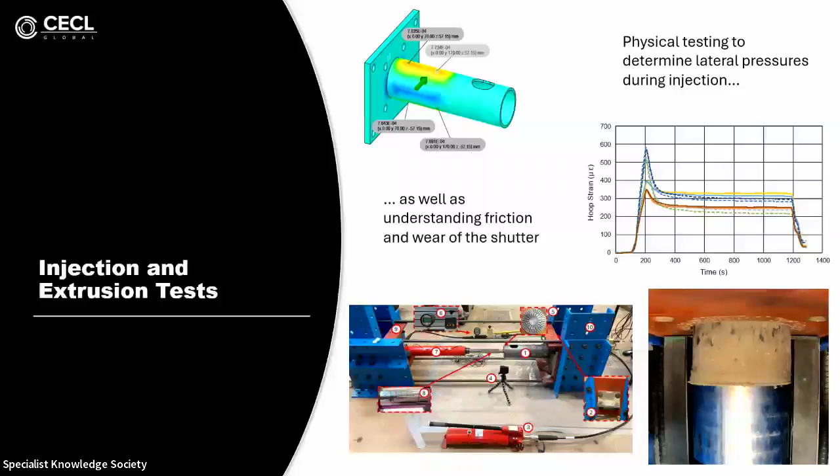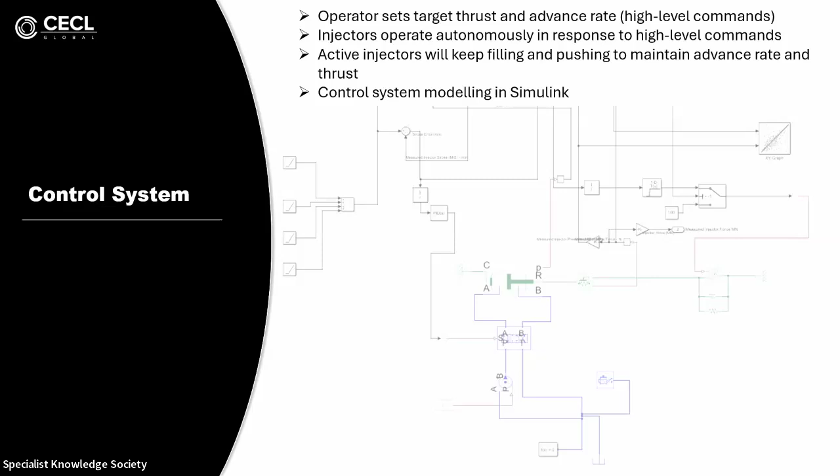If we look at the control system, we're working with our partners. We're civil engineers, we're just simple tunnelers, we're not mechanical engineers. But when we look at these processes, what is set at the beginning is what face pressure do we need and what rate of advance - those are the high level controls.

And then the system will automatically - the injectors will work with the one variable that they have, and that's the speed of the advance. If we're going at sort of 10 mil a minute overall TBM advance, then the injector speed will be probably 1 or 2 millimeters a second. At the higher rates, it'll probably be around about 10 millimeters per second. So these things are not running anything like the speed of a concrete pump.

What you've probably seen there, and I haven't explained at all, sorry, is how in a simulated environment, by varying that advance rate and the face pressure, you can see that it turns the injectors on and off.

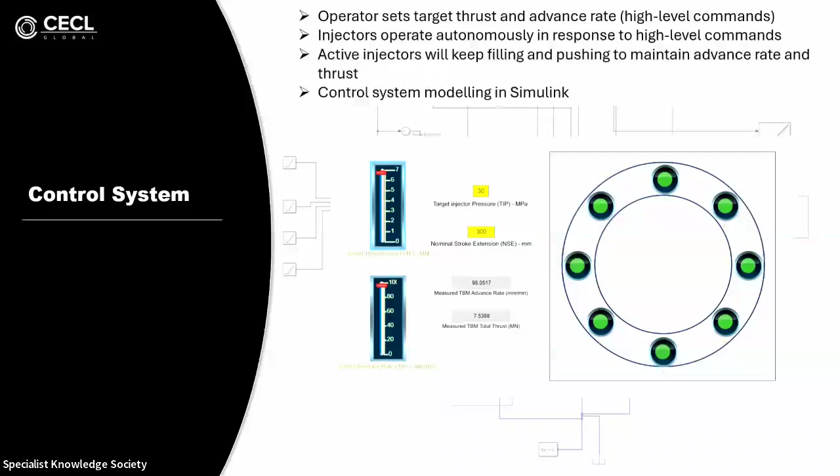Logistics, this is, I think personally, the biggest challenge, if we want to look at supporting world-class advance rates. Our partner, which we'll talk about in a minute, has 15 of the 18 world tunneling records at different sizes. Most of those, I'd have to say, are for unlined tunnels in rock.

But with this process, what we're suggesting is that it's only the excavation process which is governing your overall time for construction. So we are not suggesting that we pump this material long distances. We're hoping this system will be used for 5, 10, 15, 20 kilometer tunnels. There is no way we would suggest pumping or stage pumping a wet, effectively concrete, those sorts of distances.

So what we're proposing is that the coarse aggregates and the sand are taken to the face in conveyors, and the cementitious component and the water is in a slurry. So the little video you saw of Henry and my other colleague Era looking at the viscosity and the rheology of these grouts - we're absolutely confident that the open time for these grouts will allow us to pump the cementitious materials to the face and mix with the aggregates at the face.

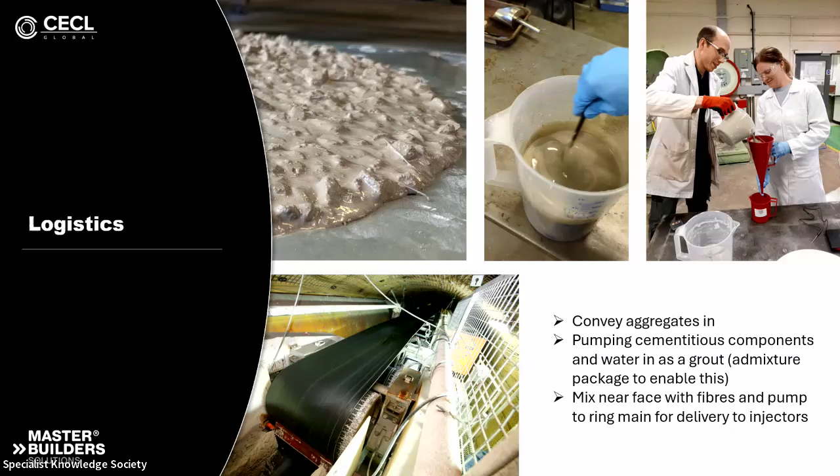A number of years ago, I worked for the Hyperloop technology company in California - I say worked, that implies getting paid, I didn't get paid. At that time, I said you should really look at slipform tunneling. I gave them everything I had on slipform tunneling way before we started any of this. And they asked me, have you got a patent for this? I said no, I've just collected what's in the public domain, and I'm just saying you should look at it. Thanks very much - there's the door.

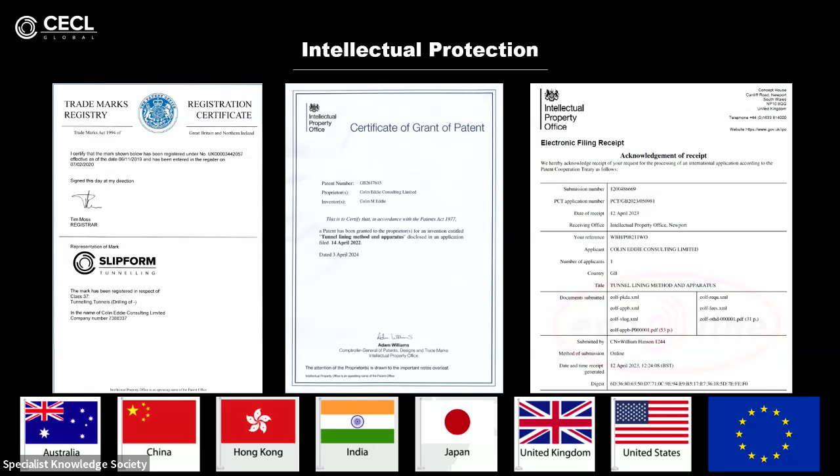And that taught me a real lesson: if you want people to take you seriously, you've got to have IP. Perhaps if I'd watched Dragon's Den, I'd know that. So we have worldwide patent protection on this. Any of you that have tried to get a patent might think, blimey, they've been doing this for 60 years, how's he achieved a patent? The reason we've got a patent is that what we're doing is completely different to anything that anybody has tried in the past.

If we look at our Slipform Tunnelling Consortium, you all know Robbins - they've been through a hard patch, they've bought themselves back from the Chinese, and they're doing very nicely now. Bekaert, Master Builders, Ugitech, Kawasaki, and Hitachi. Kawasaki and Robbins have a pedigree going back to the Channel Tunnel, so they have an ongoing collaboration. We think we've got some pretty serious partners.

Before I conclude, there are some acknowledgements I'd like to make - certainly the support of our consortium partners. For those of you that know the Robbins company, you'll know Lok Home, who has been incredibly supportive, and his chief engineer, Brad Grothen, and Bekaert with Benoit de Rivaz, and my good friend John Greenhouse. They're always very supportive. Master Builders - I think Richard and Andrew are here, so really thank them. And Ugitech have also been very, very helpful.

I'd also like to thank my colleagues, Dr. Era Hover - she did the heavy lifting on producing the cost and carbon calculators. That was a 3-year commission from National Highways, where we were able to engage with labour suppliers, material suppliers, the plant and equipment. A lot of the people in this room very generously gave information. And Richard Heaton, who did the visualizations you've seen today, our patent lawyer, is an absolute star.